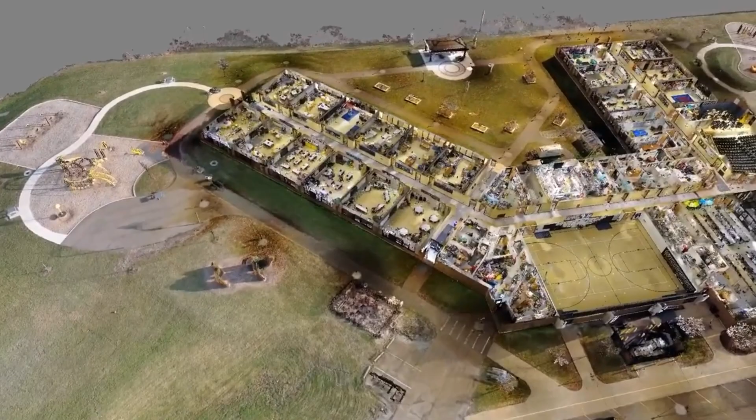Using these side-by-side views, you can actually see what's behind it, and you can see it in the full context of the current situation. You can add color to any one of your scan profiles. Now I know exactly where that is, and when I run my analysis, I can come back time and time again and do repeat analysis to make sure the work has been fixed.

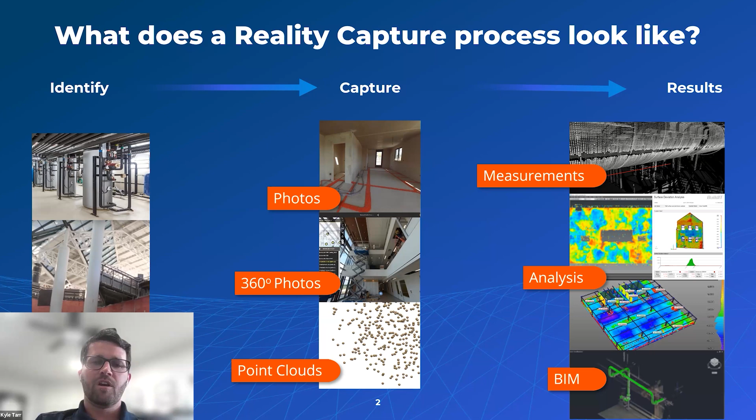But finally, a lot of people like to do the scan to BIM workflow, documenting existing conditions and then turning that into a real usable model for moving on into a digital twin kind of environment for facility management and future renovations. So having the actual BIM model versus the point cloud in its raw form could be a real big advantage. So these are the things you really want to think of and keep in mind while you're looking at the different devices or collecting your data, and then what you want to do with it.

Something that you will hear a lot from us moving forward, and it has been for the last several months really, is that the time to consumption is the key to any collection process and any workflow that you're going to be working on. What I mean by that is you can really break up this whole process into collection and consumption.

So collection being why you're on site, what equipment are you using, and what methods are you using to collect data. It could be something as simple as a few $100 360 camera, or it could be a much more expensive tripod-based laser scanner. These all have different costs associated with them, and they also have very different timelines associated with them as far as how long you need to spend on site to collect that data.

On the back end, a lot of times we consider this to be VDC professional work, the BIM manager's work. It's the consumption side. But we really want to be able to democratize that, make it so that project managers out on the job site, facilities managers, owners, superintendents, and foremen, everybody should be able to have access to this information that's collected and actually make use of it.

I think back in the day when I was on a job site every day, every couple hours, I had a superintendent come into my trailer and say, hey, can you pull up the BIM model, or can you pull up the point cloud and show me or pull a measurement from this? Those days are gone. We're at a point now where everybody has the ability to actually go in and use the point cloud data in conjunction with the VDC efforts.

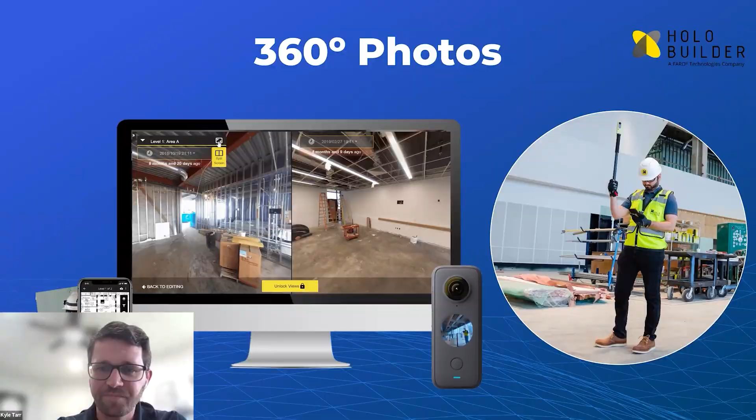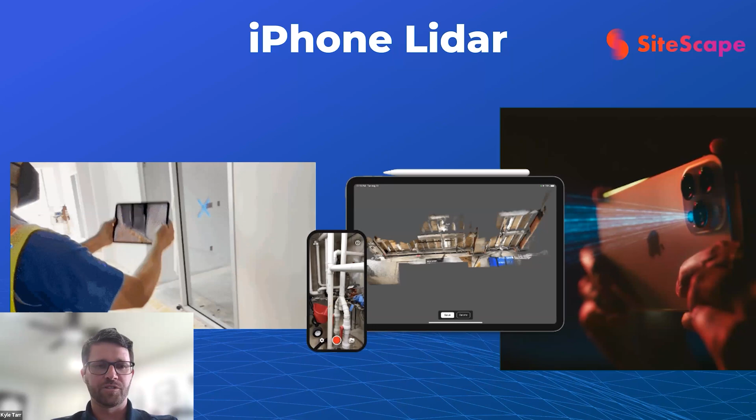Sure. So the way this currently works, you can export - I'll go a slide forward so we have that animation here - but you would collect the actual scan data, which is very quick, as you can see. This is the iPad. Once you complete your scan, you can view it, and then it gets uploaded to the server. Once it's up there, it does all the processing. It's going to register the scans together, currently the ones that are in Sitescape. You can do, I believe, 3 scans, 3 or 5, depending on your package, and it will register them together, and you'll have them available online.

You can also, from the web browser, download it as an E57 and then use any of our software from Scene or BuildIt, or any third-party software as well. You can register them together, they're compatible files. The most common file that people are using from the iPhone LiDAR is E57. Just about every software that deals with point clouds out there is going to accept an E57 file, so this will pretty smoothly work into just about anybody's workflow.

We do have a couple of new features that were released not very long ago for the Sitescape app. The first one I think is a great one: you can actually take a photo. So as you're scanning and collecting your 3D point cloud data, you can stop right there and, in the app, take a high quality, high resolution photo with your iPhone. You might think, well, why would I want a photo, I've already got a point cloud. Well, if you're going to scan an electrical room, for instance, scanning the whole room, you're not going to be able to read the labels on the breaker panels or an equipment tag just in the point cloud.

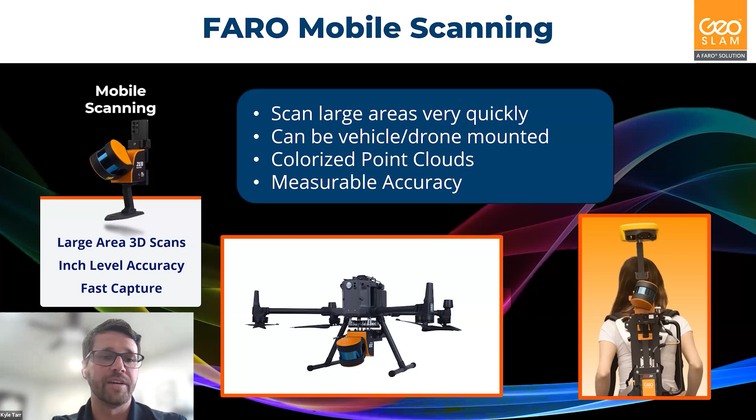This is, of course, a colorized point cloud. I have an example of one here spinning around. This scan here would have only taken a few minutes. It's about as fast as you can walk around an area is how fast you can capture this data at a really good, clean resolution.

With this, you can pull it in and, of course, do cut and fill analysis. One of the other options is you can use it to create floor plans. A lot of times right now, we're talking with big box retailers doing renovations. It's a very common topic that we hear, that maybe the building's been around for 20 years and they've lost all of their as-builts, or they never had them. Now for their remodel, they need a floor plan that actually represents where all the aisles are located, where all the rooms are. Something like this is a great way to create those floor plans as well.

And of course, just like with Sitescape, you can export to an E57, bring it into our software, and register it with any of our other scans. So the whole ecosystem likes to work together in a way that is consistent. You're not using multiple softwares.

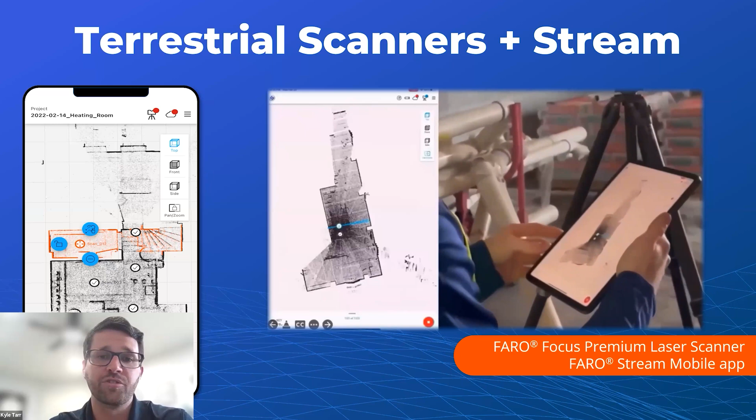Terrestrial scanner, I mentioned before, our flagship terrestrial scanner now is the Focus Premium. This one is really best when you pair it up with our Stream app. The Stream app is our tool that allows you to pre-register your scans as you collect them, which, for anybody that has done scanning before we had this kind of visibility, is a huge improvement over the, I'll almost say, mystery of where have I scanned and what data have I collected.

This gives you full visibility, as you can see here. I have my colleague that was scanning, and you can see as the data comes in, it registers automatically, and it shows you exactly where you've been. So you're seeing a top-down view of this building, and we know that we've got this room covered pretty good, and he would keep working his way around.

The great thing that I like about Stream is its connection to Sphere. Sphere is our web platform where we can do processing of point clouds and sharing, annotating, and of course, viewing through a web browser. Using the Stream app, you're able to upload your scan directly from the job site.

So finish collecting your data, connect to a Wi-Fi connection on job site, and you can push your entire project up to the cloud and allow it to process in the cloud. So the great thing about this is, if I'm going to send somebody out to go do some scanning, I don't have to send them with a huge BIM laptop to be able to process the data and then upload it.

I'm actually able to just send them with a scanner and an iPad or even an iPhone, and they can do the same thing. So at the end of their day, they can upload, and before they're even back to the office, I have access to the data, and I can see exactly what they've got done. So very cool tool, and I think this is a big improvement in the workflow that we've got.

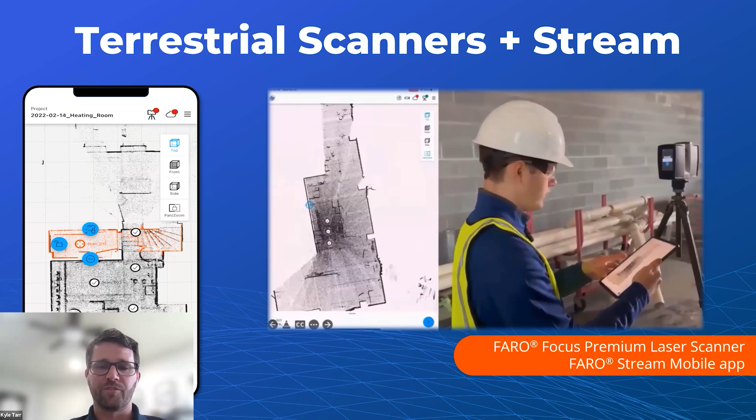That's awesome. Can I throw a quick question in there? Would it just be based on internet speed, if you were doing a lot of scans on site and you have 50 or 100 or 200, what does that look like time-wise to actually get those uploaded or pushed?

So it is definitely very dependent on your internet speed. But to get all the way pushed up, I think our average is about 30 seconds to a minute or so per scan. Okay. Kind of on an average internet connection. You can do it over cellular too if you've got a really good plan. If you were just throwing your iPad in the passenger seat of your truck as you're driving back and let it upload, you can totally do that.

But yeah, it will upload on its own, about 30 seconds to a minute to upload them, and then the processing on the back end will start automatically. So normally this is something you would have to import onto a laptop, process, do the registration. It's going to tie up your computer for hours and hours. And now with this, you've got it all happening in the cloud. So you're free to go about the rest of your job. Awesome.

So I am going to start moving a little bit quicker here, but I did mention the speed stuff. We've had a couple of great improvements to the Focus Premium since its release. One was our ability with the PanoCam. Some of you have probably seen it before. We have improved it quite a bit, and with the PanoCam attachment with the Ricoh Theta camera, you can add color to any one of your scan profiles for only a 2-second extra scan time, which is great for what I like to call color for context. The image resolution is not as good as the internal camera, but it gives you a great idea of what you're looking at in that colorized point cloud.

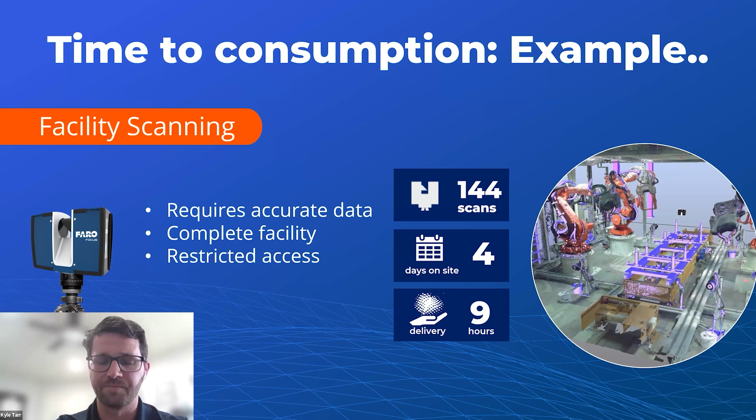Now, utilizing the flash technology, getting the same number of scans, 144 scans, it only took half of a day. And the other big time savings as well is that delivery time went down from 9 hours to 2 hours. And a lot of that can be attributed to being able to upload straight to Sphere and let the processing happen on the back end. It's happening while you're still just driving back from your job site.

So huge time savings, and especially for facility owners and situations like this where you're going to be doing large areas, maybe repetitive scans, maybe every year, every month, you're doing updates to your facility. This is a great improvement. It makes it much more feasible to do more scans, which everybody would like to do.

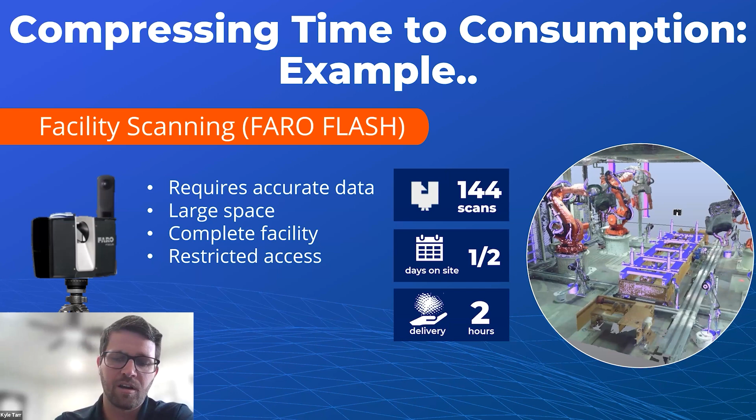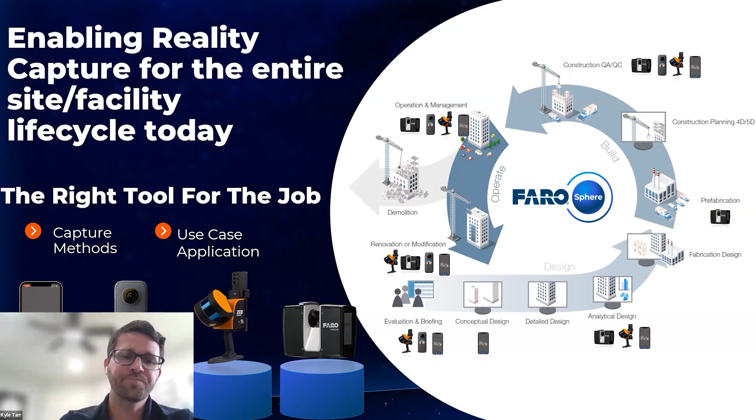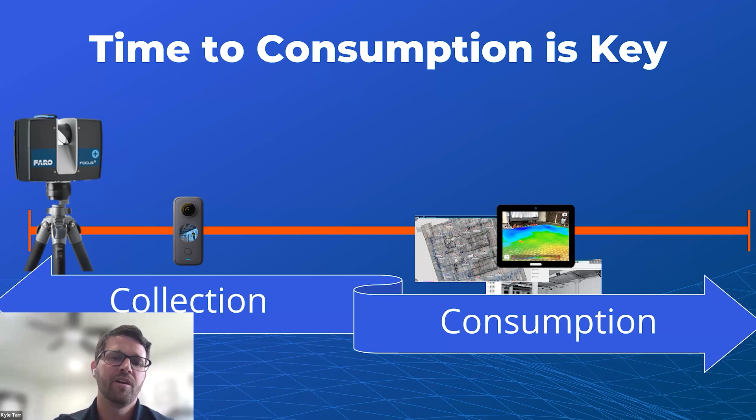So back to the slide, I told you it would return. We've talked about the collection side. We know we've got so many more options now, and speed has been cut dramatically. But what are we going to actually do with that data? Well, a lot of people would like to use the scan to BIM process. If you're using Revit or AutoCAD, then we have a plugin called As-Built. It has been getting some great improvements lately, but As-Built, like I said, it's a plugin for Revit.

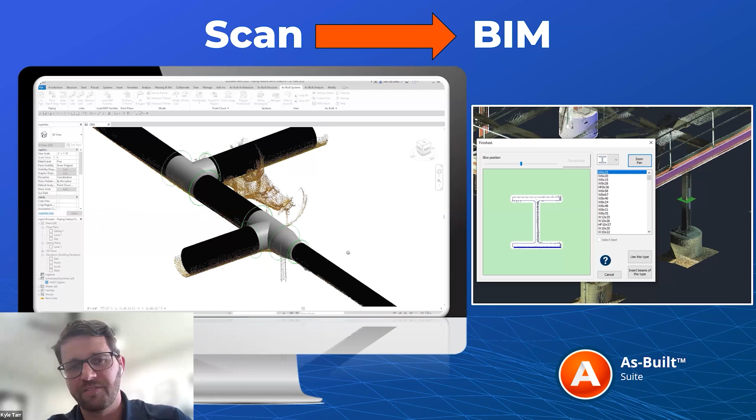It allows you to use the point cloud data to actually model pipe, conduit, fittings, and valves, as well as structure, like this wide flange beam here, and it will identify them as the size that it is in reality and allow you to model to it with Revit families. So this is a great tool for actually turning a point cloud into a full-blown coordination model, or an as-built model, or however you want to use it.

The best improvement that we've got to this lately is the addition of ductwork. So you can now model ductwork right in Revit based off of your point cloud. And anybody that's dealt with ductwork knows they go up, down, they change, all the sizes are always changing, they flatten out and go over pipes. And that's actually a very tough one to model, but we now have that feature and ability to do that. So highly recommend that for every Revit or Autodesk user.

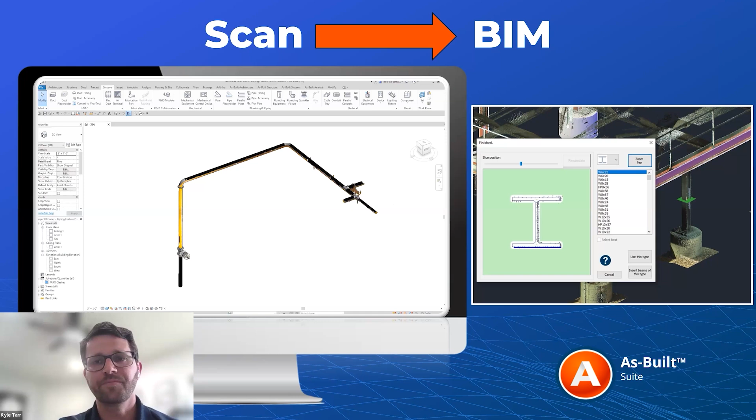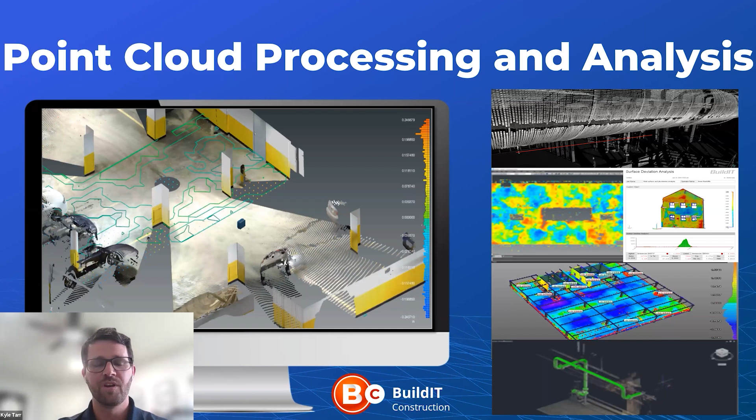You can actually use this software to compare to your BIM model as well. So if you have a mechanical room with your pipe running everywhere, you can scan it and then bring in your actual coordinated, signed-off BIM model and then run an analysis.

And it will tell you everywhere that a pipe is missing, somewhere that maybe a pipe is not sloped at a proper pitch for drainage. All those things. It will tell you exactly how your as-built point cloud differs from your coordination model. So this is a great tool.

This is actually also the best tool for doing heat maps of floor flatness. We do this quite a lot on wet and dry concrete. I'll talk about our other app as well, but basically giving you a heat map that shows you the high and low points of a slab. And you can also do this in the same process with a surface deviation analysis for elevator hoistways or walls that you want to make sure are plumb.

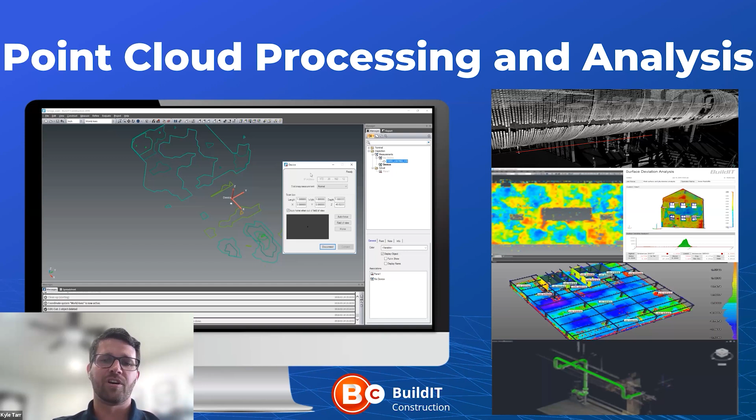I have actually used the software for this exact purpose on an elevator hoistway on a job site, and we found there was a big depression on the elevator hoistway right where one of the rails was supposed to mount to. So finding these things early on saves a lot of time on the back end when that elevator contractor shows up and wants to install. So very cool tool, has a lot of different features and functions.

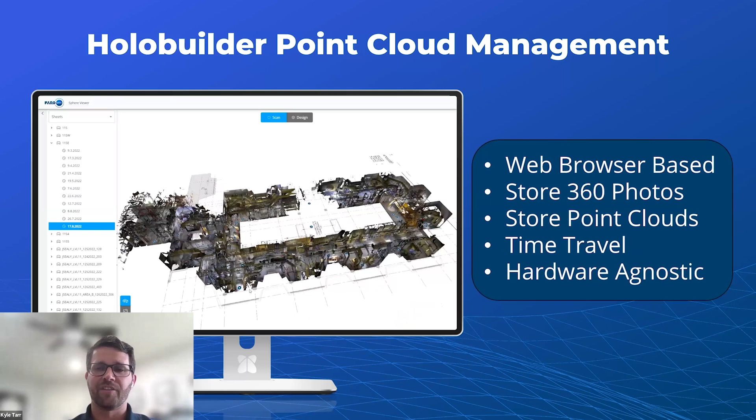Now, our newest release here is our integration for HoloBuilder, called Point Cloud Management. So we talked about bringing all these different pieces together. Well, this is a great example of how we've done that. Within HoloBuilder, if you're a HoloBuilder user, you now have the ability to upload point clouds directly onto your project. You'll see it just like you're seeing here. You'll have all of your 360 photos available to you in that same time travel format, so you can jump back in time. You can also do the same thing now with point clouds.

So I can have a point cloud taken every month, and I can compare July's point cloud to August's point cloud. I can see the difference. This is a very, very cool tool and really a great way for people that have gotten into HoloBuilder and use 360 photos in their workflows, but want to take that next step and start bringing measurement-accuracy point clouds into it. It works with any scanner. So completely hardware agnostic. E57 files upload straight into the platform and will work just fine. So highly recommend trying that out.

If you have a point cloud and you're using HoloBuilder, this is a great way to share the data and democratize it, like we said before. So giving everybody access to it. All you need is a web browser, no software needed.

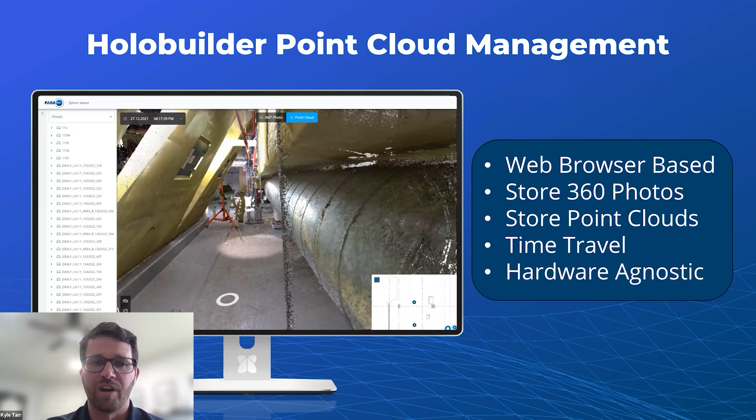Now, one of the last things we've got here is another example of crushing that time to consumption that we're always chasing. We have a Flatness Check app. We can use this on wet and dry concrete, and all you need is an iPad and your Focus Premium scanner. Go out on a job site. The iPad will do all of the controls of the scanner for you. You don't have to mess with any settings. It guides you through the whole process. Very easy to follow the steps.

And within less than 5 minutes, you can do a scan, create a heat map analysis, and see almost instantly where the high and low points are on that slab. It's so fast, you can actually do this on wet concrete. Works quite well. I've done it. You can actually identify where your high points are in your wet concrete. And then as your finishers are coming over and doing their final finish, if you've got a high point, they can just level that out a little bit. Saves a lot of time on the back end. If you don't have to come back and grind it, this is a much better option.

Another thing that I really like to use this for is if I do have an issue, maybe after the concrete has already dried, I find out that I've got a high point that I'm going to have to come back and grind. Well, traditional methods are not the most accurate. You might have to come out with a total station and actually shoot in the location of that high point so that the grinder knows where to do his work. Using this, I can actually use the augmented reality function on the iPad and walk around on the slab. And I'm completely immersed in the analysis data.

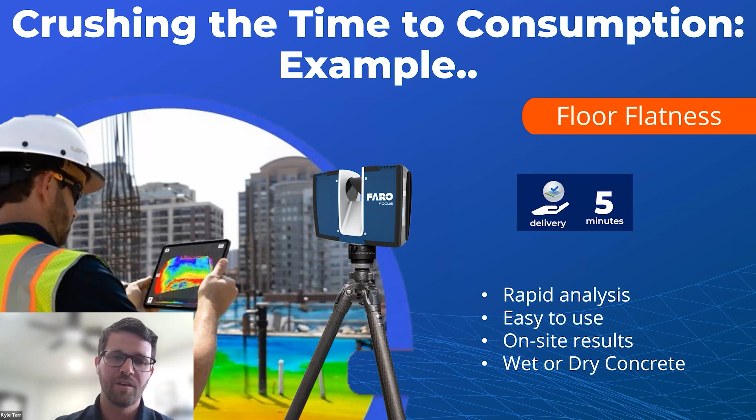I can walk over, stand directly on top of that high point and mark it down by my feet with a can of spray paint. So put a dot there, mark on it that it's a 1/4 inch too high. Now when they come back with the grinder, they know right where to go. There's no errors. There's no time trying to figure out where to go. So we've added a lot of features to this one as well, just over the last couple months.

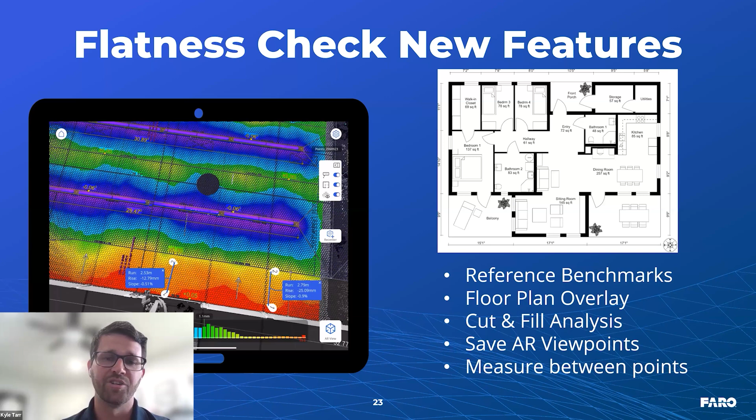One I think is the greatest is our benchmark elevation. It will now identify targets so that you can do repeatable analysis off of the same benchmark elevation. I usually go out there, I find wherever my contractor has snapped a benchmark elevation on a shear wall somewhere, and I tape my target right over top of it. Now I know exactly where that is, and when I run my analysis, I can come back time and time again and do repeat analysis to make sure the work has been fixed.

We can also overlay floor plans in the augmented reality view, which is great for walking around and really knowing what room you're in, what rooms have issues. Not every room is as critical as the rest of them, right? So maybe you don't have an issue at all. That's a great way to see that. Cut and fill analysis as well.

And then what this video just showed is the measure tool. I can select 2 points and it's going to tell me the slope between those 2 points and how long that line that I just drew is. This is great for the general contractors, I think, as well, because we're always dealing with Americans with Disabilities Act code requirements for ramps. This is a great way to scan that, hit 2 points, and now it'll tell you exactly where your slope is on that ramp. You know if you're going to pass or fail that inspection before the inspector gets there. This can be a huge time-saving tool.

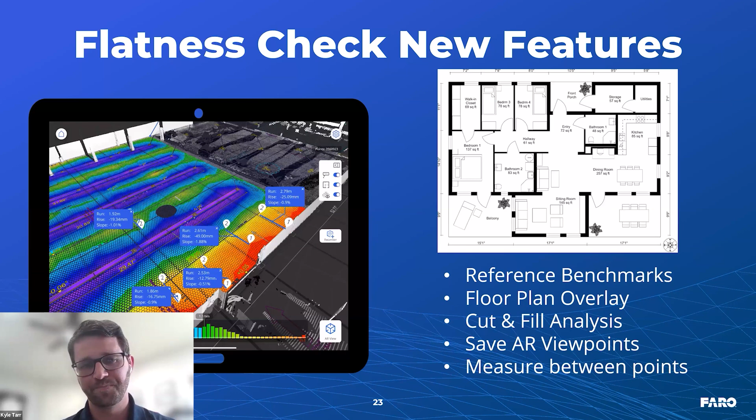Jump through this. Just a reminder, it's always a balancing act, right? Speed and accuracy and what you want to do with it. Choosing the right tool for the job is what you need to do.